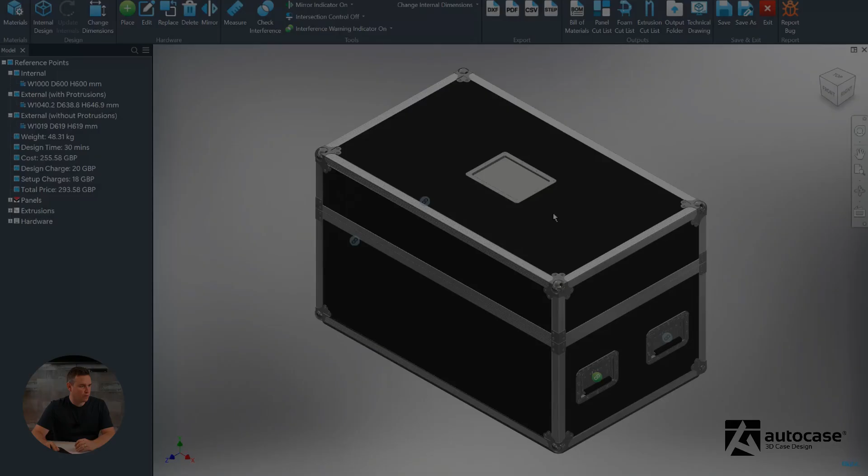When using anchor points for placing casters, it's good to understand best practice for that. So if we place a caster onto this caster board that I've already put in place, we get a total of 9 anchor points here. We have top left, bottom left, midpoints, and so on.

So just like with handles and latches, it's good to choose an anchor point that is close and relative to where you're going to place the hardware, assuming that you would want that relative offset or that relative distance from the hardware to the anchor point to maintain.

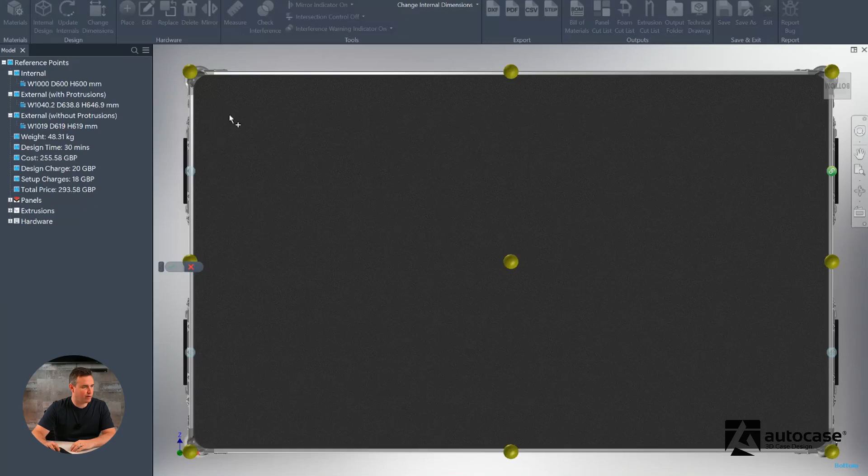So for the purposes of this demonstration, I'm going to place a caster at the top left as my starting point, choosing my top left anchor point. I can place the caster anywhere I want on this caster board, and if I wanted to, I can actually place it directly to the case by clicking this button here, but that's for another video. So we're going to keep it connected to the caster board.

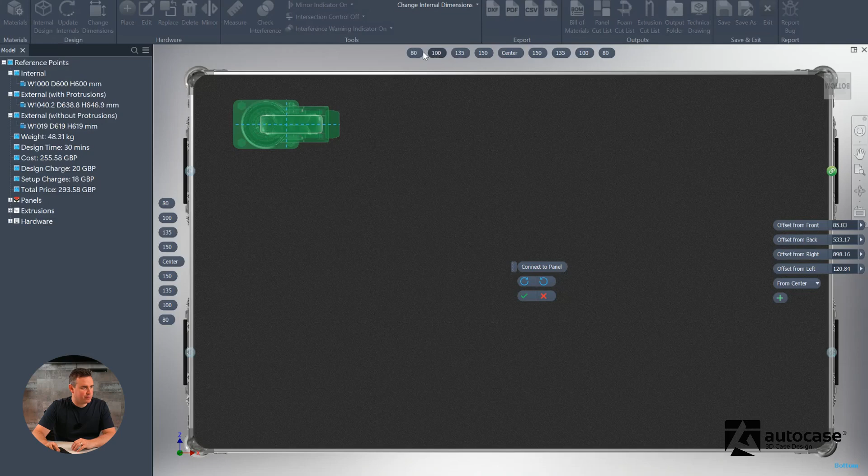So in this scenario, let's choose some presets. We'll just do 80 by 80 for now, and that is from the middle of the caster plate - 80 millimeters, 80 millimeters. We'll apply that. So now we can mirror that caster over to the side if we want to save some time. So selecting, just so you can see I've selected that work plane, mirrored that caster over.

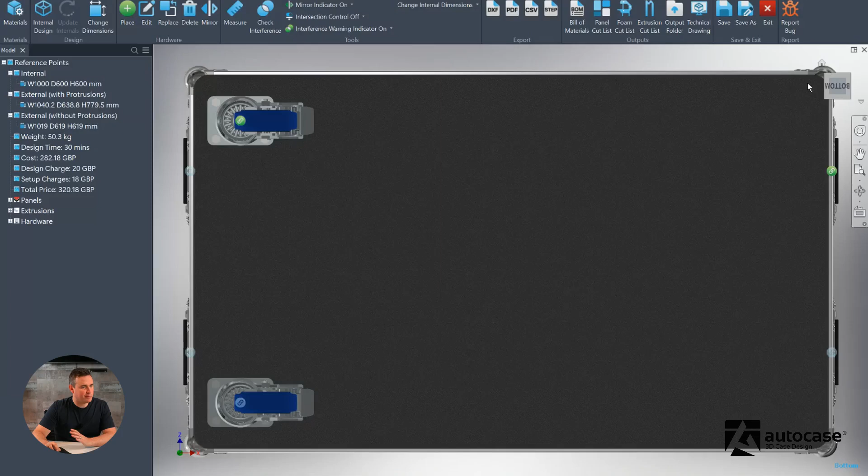And what we'll do is we'll now do the same but for the other side. This time we'll choose an unbraked caster, and I'm going to choose the top right anchor point here, and then just to keep it in the same position, I'm going to choose 80 by 80 so it's the same measurement, and then we can also mirror that caster over this work plane, and we now have symmetrically placed casters.

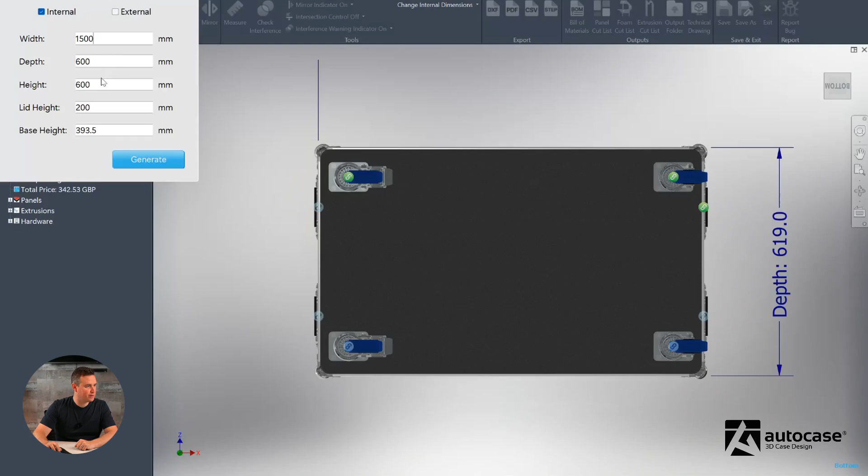But because I've chosen the anchor points, it will now remember this relative distance. So if we change the case size and make it quite a bit wider, maybe make it quite a bit deeper, you will see once it updates, these measurements will maintain. And there you can see the case has got bigger, but the wheel has stayed the same measurement from the anchor point.

Now, when we selected the first anchor point, this was top left, and we mirrored the caster down to the bottom. In that process of doing so, the caster also knows that it needs to change its reference measurement, so that has been done automatically for you.

If you wanted to add a mid set of casters, we're just going to use unbraked. Now this time I want them to stay in the middle of the case, but I wouldn't choose this middle one because it will then remember the measurement from here to here where I place the caster. So I'm going to choose, similar to the first casters, I'm going to choose top.

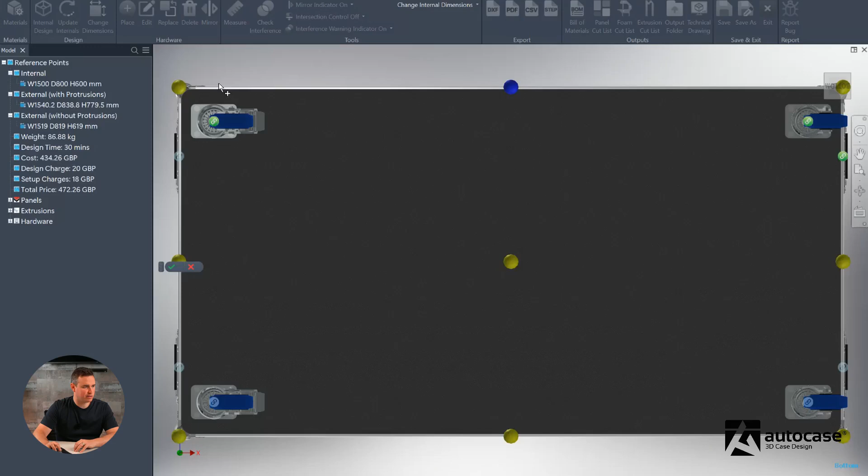So top center, I'm going to move that up in line, place that, and then quickly mirror that over. A little bit easier to see it at this angle with the work plane. And then we've got our green tick here to apply that.

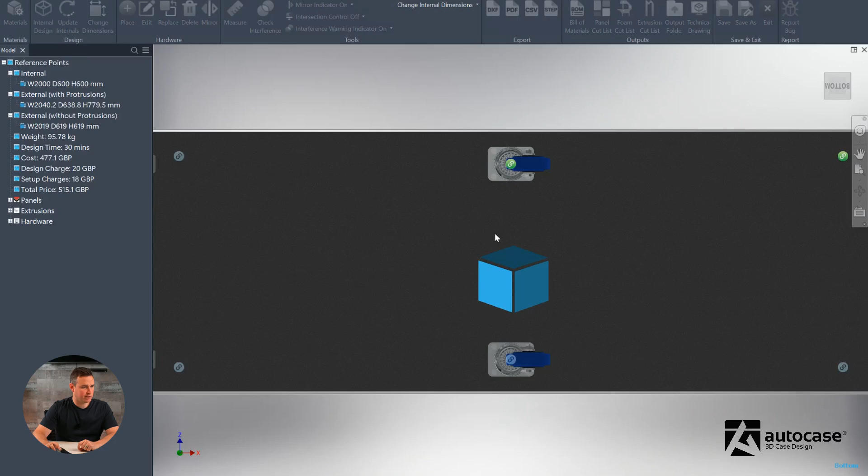So now, one final dimension change. We're going to make it wider, shallower, and you'll see that all of these relative measurements are going to maintain. So now that it's updated, you can see those measurements are all the same.

And if I go into my edit mode just to check into the caster, I'm going to edit the position - you'll see once we're in here, yes, we're still 80 millimeters as we set in the first place. Then we'll exit out of that.